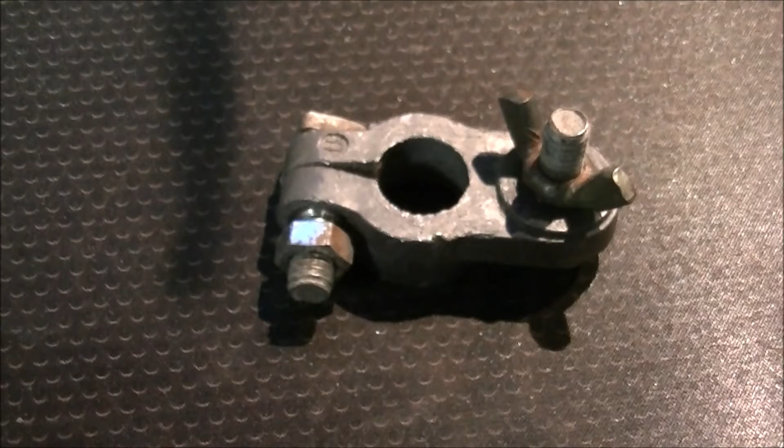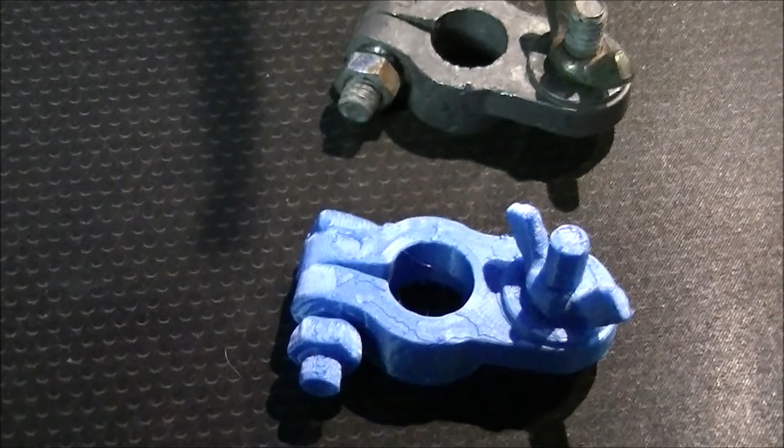How to go from a solid object to a 3D printed version of it without editing, using a Seal Lite scanner. In simple form? Not at all simple.

For Christmas I got this fancy new Seal Lite 3D scanner, and I do a lot of 3D printing and CNC work, so it would be really nice to scan objects without having to design them all using CAD. After using the scanner for a few hours, I got very frustrated, and did a lot of searching for tutorials, trying to scan a relatively simple object, nothing too complicated, and what I really wanted was a 3D version of it.

As you can see, I have been successful, so I thought I'd build a quick tutorial - I don't know if it'll actually be quick in the end - that walks people through initially using the Seal Lite scanner, and specifically the JMStudio software, because that's where I stumbled. It's brilliant software, but the learning curve is very steep.

For this tutorial, I'm going to scan this object. It's certainly a less than ideal layout here - I'm just scanning it on my mouse pad in front of the computer - but I was able to get reasonable results using it, so for the purposes of the tutorial I'm going to go with that.

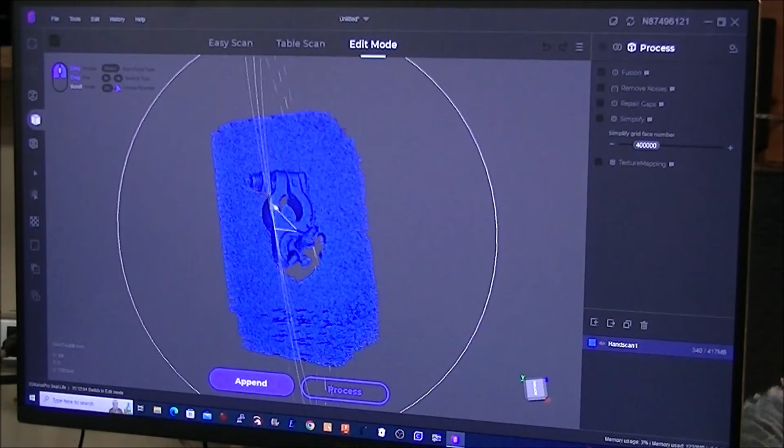If I hold the Shift key down, I can just rotate it, and then turn it around and see where it is. So obviously I need to see what's on the other side, so I'm going to rotate the object around and append another scan.

I just click on the append button, and you can see when the preview comes up, I'm moving it to the center, onto the dot up here. I've just centered the object on the dot.

My brightness is set to 9 right now, and you can see I'm getting a few of these red dots up here, which means it's a little too bright. I probably could lower the brightness a little bit, but anyways, I'm just going to go with this for now.

I go to scan, and again I tilt the scanner up and down a little bit, rotate it a little, up and down, and rotate it the other way. I'm not sure whether this is good or bad or perfect or what - anyways, a couple hundred frames, click the pink button there, and that is my second scan.

As soon as it finishes rebuilding, now I have two scans, and the key is down here in these two areas.

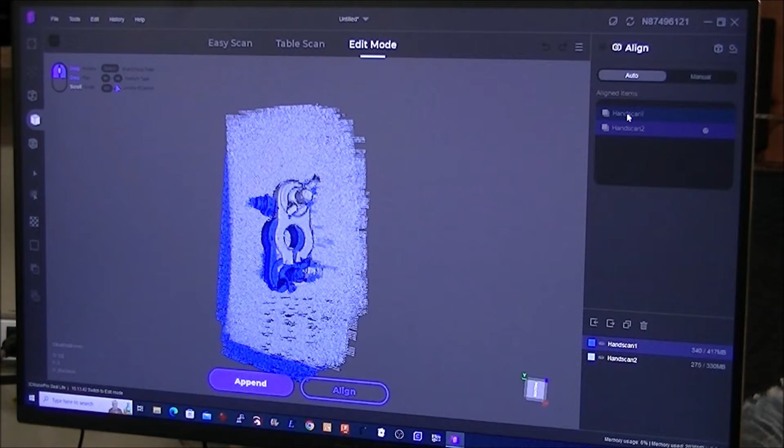The magic that I was missing initially has to do with this view toggle. I was taking these two scans and trying to do an align, and I'd get an error message saying at least 2 scan data required, and I'm thinking, I've done 2 scan data, why isn't it doing that? Well, 2 scan data have to be visible in order to align them. So as soon as I click on the eyeball here so that both are visible and they show up in the upper area as scans for doing alignment on, then I can do an alignment.

It will take not too long to do an alignment, and it will be a horrible alignment. This was the next piece of the learning curve. I'll let that finish. And you can see that hasn't aligned them at all in any reasonable fashion.

So the next piece of the learning curve I learned was go back to the editing screen before I do an alignment. What you have to do is make sure you get rid of anything that isn't part of the object itself. I'm using the control key here, a strange little lasso approach, to lasso areas that are not part of the model itself, and it will highlight them. Then I can hit the delete key and get rid of them. I believe there are faster ways of doing this, but just reorient the model and lasso areas that are not part of the model.

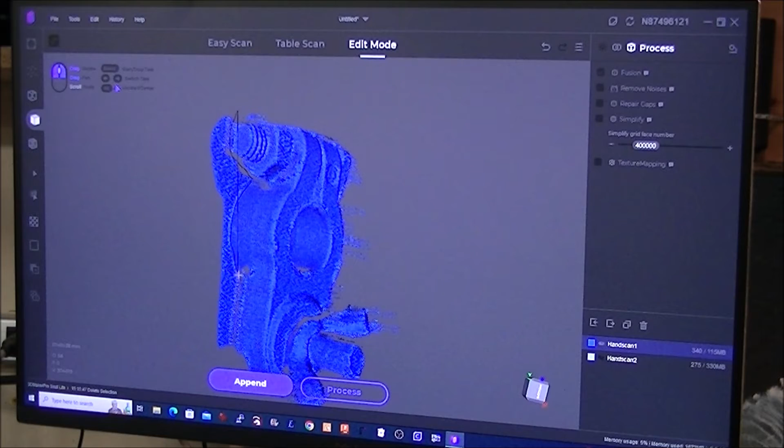I'm going to do a rough cut here on this. It'll highlight that, and then I can zoom in on the model and do a much finer detailed hack of things that don't belong. So I can trace around the base of it there and get rid of things that don't exist.

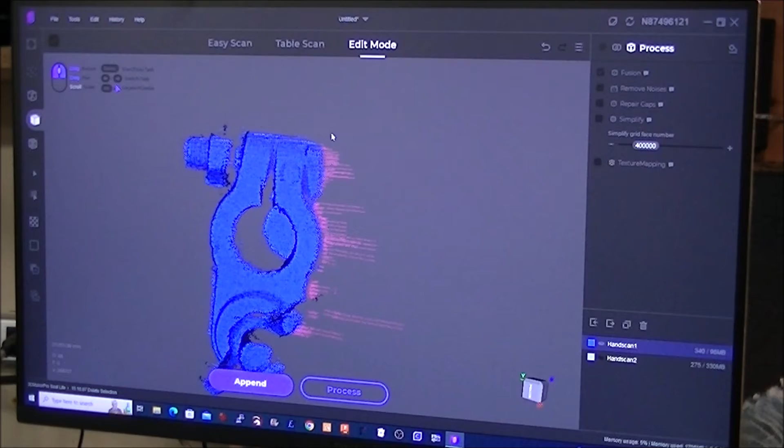Lasso, highlight, delete. It's actually really crucial that you get rid of things, even extraneous things that are out here. So holding control again and getting rid of all these extraneous bits that are well beyond what the scanner could see because it was on the back side. Orienting the image in different ways will really help you get rid of a lot of things that don't belong. You can see underneath here there shouldn't be anything, so I can get rid of everything that's underneath there.

Cleaning up any of this extraneous garbage is just as important as getting a good scan in the first place. So getting rid of what doesn't belong in the scan is as important as getting an accurate scan. You can see I have some pixels up here that don't belong either.

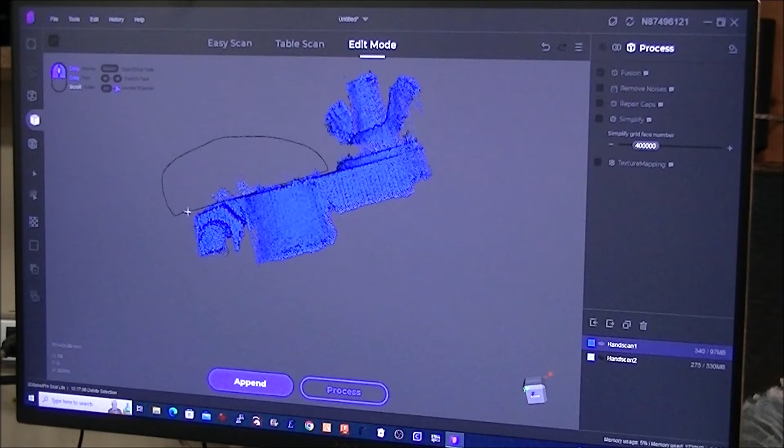So I can go around and just lasso like that and select those and get rid of them. Now I have a much cleaner scan. In fact this circular part here doesn't belong as part of the scan either, so I can highlight that and get rid of it because that's part of my mouse pad on the bottom, and I can do that.

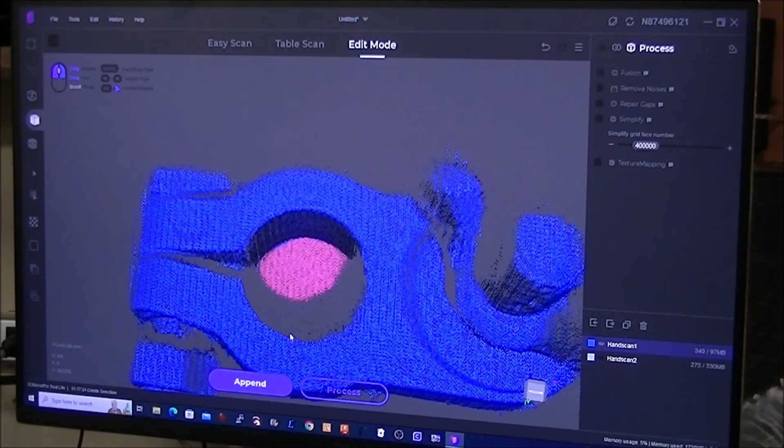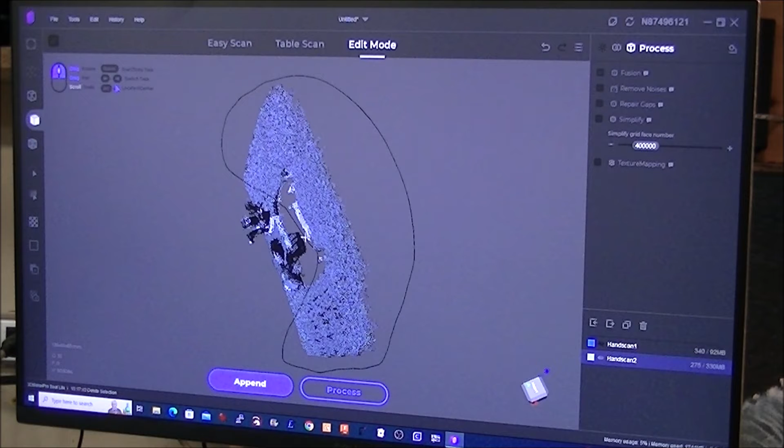Now that I've done this scan, I can make it go away by getting rid of the eyeball there and click the eyeball on this one, and I can do the same on this. You can see sometimes just different orientations make it a lot easier to highlight and eliminate what you want to get rid of very quickly without spending a lot of time on it. So I can do that. That highlights a big area and gets rid of it.

Then I can shift to a different orientation and lasso more. Let's see how good I can do here with the mouse. Lasso that and get rid of it. Again, I have pieces here off to the side that clearly are not part of the model, so I can get rid of them as well. I can just run down this side. It is just as important to get rid of pieces that are not part of the model as it is to scan accurately in the first place.

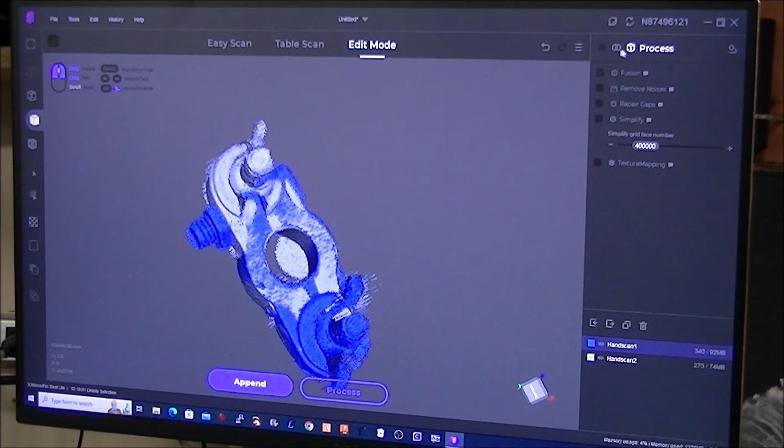I'm not even going to bother doing any more cleanup here. So now at this point, I can highlight both of these models and go back up here to click on Align and tell it to do an alignment. This time, because I've gotten rid of the back, you can see it was at least able to align them in a reasonable fashion. It got the right ends pointing in the right way, holding shift to rotate. So that is a much better alignment.

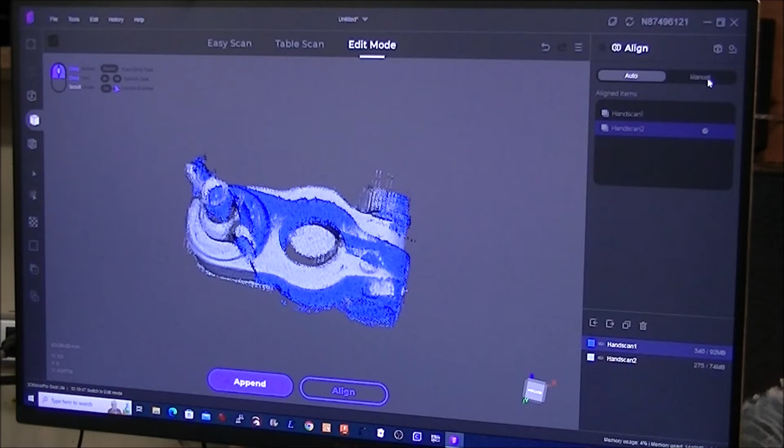It is not perfect, so I can go back to Align, and this was something that took me a while to figure out: I can go into manual align mode. What we have here is you can turn on or off which models you want to use, and the first one you turn on becomes your reference. The one at the bottom is the reference.

And the second one you turn on is the one that you're going to try and align in the same orientation. There are 3 points here, 1, 2, 3: red, green, blue, and they're highlighted over here. You can choose which one you're working with at the time. You want to find views of the model and rotate each one so that you're looking at the same area.

So I've got the red one here, and I'm going to right click to place the red dot here on this one and here on this one. Then I'm going to select the green dot, and on this model I'm going to right click here to place it, and on this one right click here to place it. Then the third one is the blue one, and I'm going to right click here to place it and here to place it. But it's important to make sure that they're both in the same place.

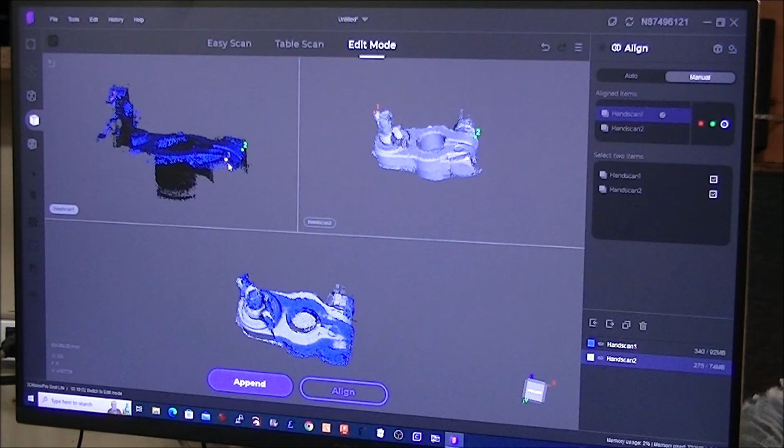Because what happens is if I right click somewhere not near a model, it will just deselect it, so I have to go back and select it again. But if I'm near a model, it'll jump to the closest scanned pixel, and I have to make sure that I'm looking at the same pixels on both views to make sure that it orients things correctly.

And so now that I've got the 3 points, I believe, correctly selected for the different views, if I do an align, it will take my reference points and do the manual alignment. And you can see it actually came much closer here.

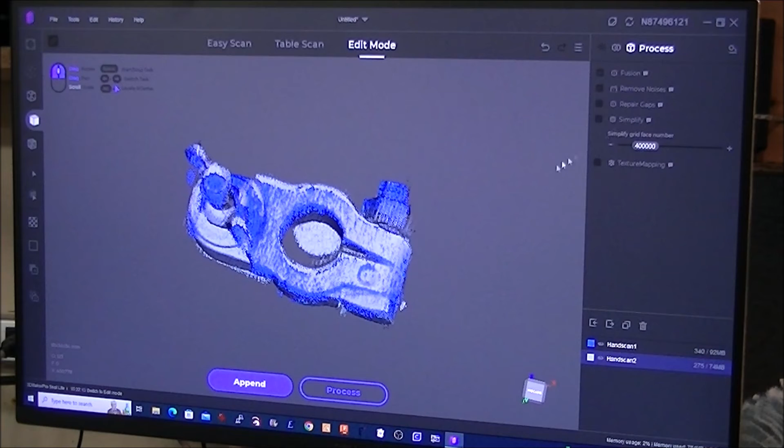At that point, once you've finished aligning, I can go back up here and go into the process mode, so that was clicking process up here. And I can make a name for it. I'll call it battery tutorial, and I'll apply. And I can refine based on those 2 scans and the alignment.

Now I can get rid of noise up here. I didn't choose those before. I'll do this one first, and then we'll go back and reprocess. So this will actually process the model and produce a 3D object from those 2 scans.

This is all happening in real time. There's no delays or anything like that. And it'll export, and I'm calling it battery tutorial V1, because we may refine this more. So there I have a 3D object, which is reasonable, not horrible.

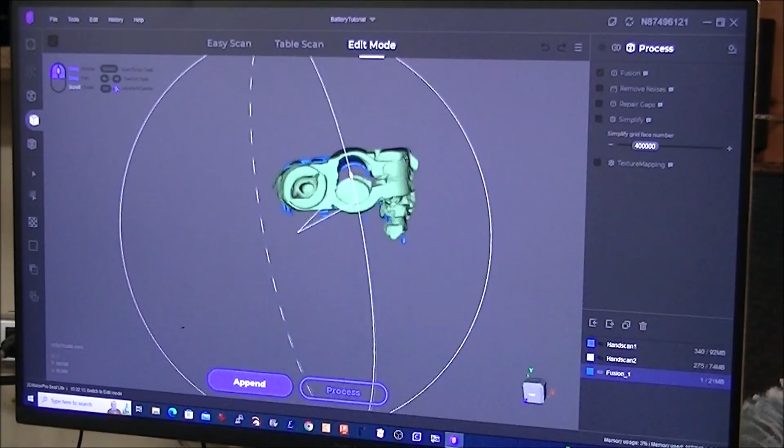But obviously the bottom side was not done because none of the scans were there. So I can do another scan with the bottom side, and again, this object has a cutout underneath which is not accurately displayed. But I can do another scan of the bottom side so that I can append another scan and realign all three of those, and that should fill in the bottom half.

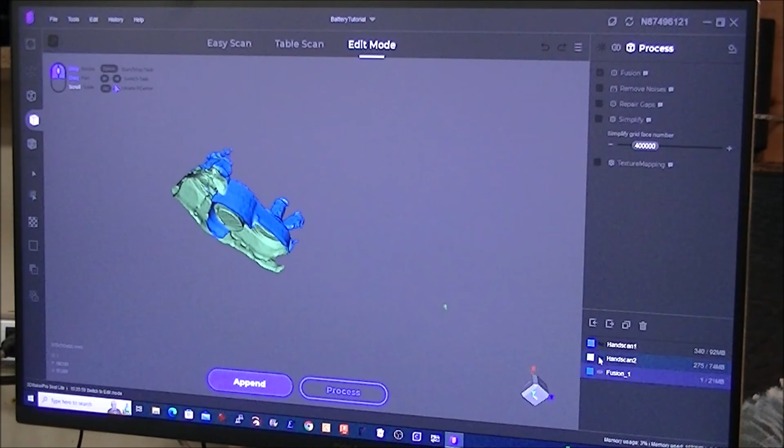The other thing I can do is go back into edit mode - sorry, not align, edit mode - and I can unhighlight the model and go back to my first or second scans here. You can see it's the silver one that I want. I didn't get rid of this inside silver, so I'll turn off the blue here, and I'll just leave the silver, and I will use my control key again to trace around.

And get rid of that - and that didn't highlight. I ran into this bug once before. I found if I unhighlighted and highlighted, then I could highlight what I wanted gone.

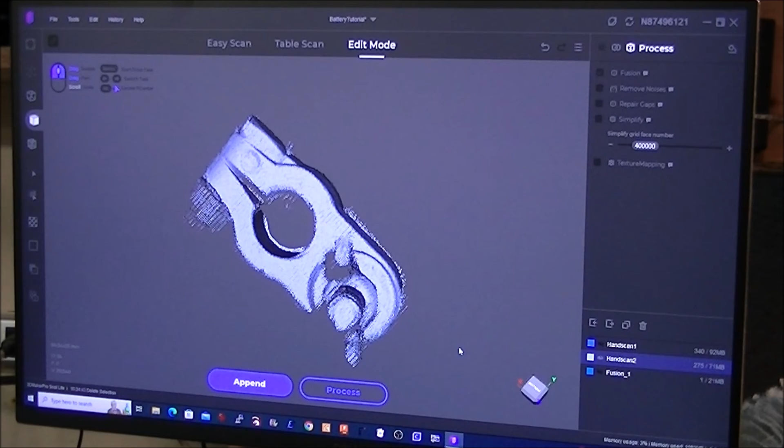And now I'm ready to reprocess, but I needed to select both scans to reprocess. So I'm ready to reprocess with the two scans and get a better 3D model without that flat piece on the bottom.

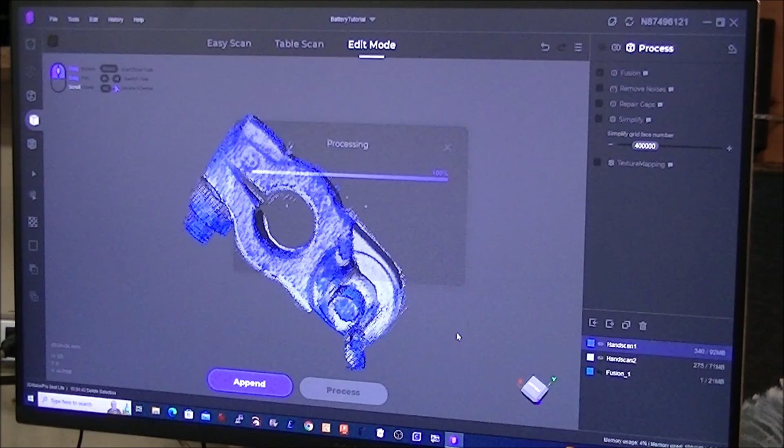Battery tutorial V2. So this is the second version of it. Now I have the same thing, but I don't have that piece in the bottom.

Now, if I choose options like remove noises and repair gaps, it will then, when I process it, try and apply things properly. But again, I have to unhighlight the fixed model and highlight my two scans to process.

This will get rid of some of the noise areas where there were single pixels that I hadn't deleted in my cleanup. So this is now version 3 of the object.

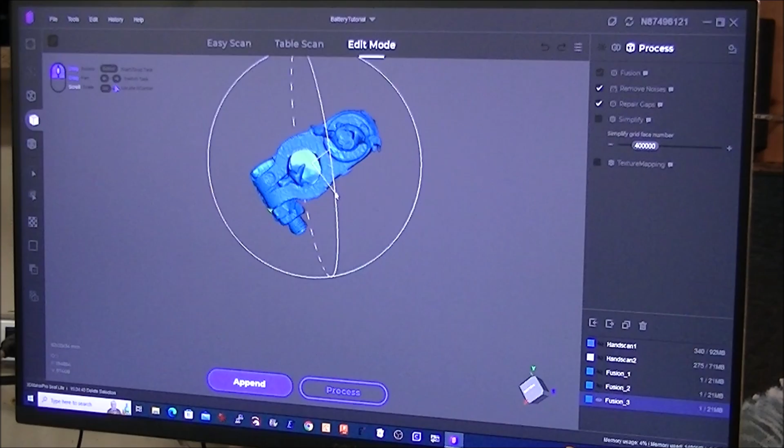And there we go. We now have - it did some repair and patched some things to make a solid model out of it. This is getting close enough that you can actually get something that you can refine further. So I think that's enough for a quick tutorial to get you going. The objects as they are, you can then bring right into your 3D slicer and print them out if you want. Hope this helps.